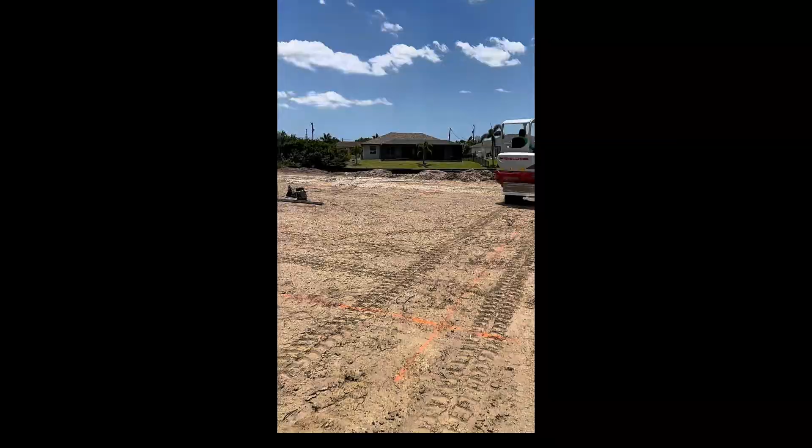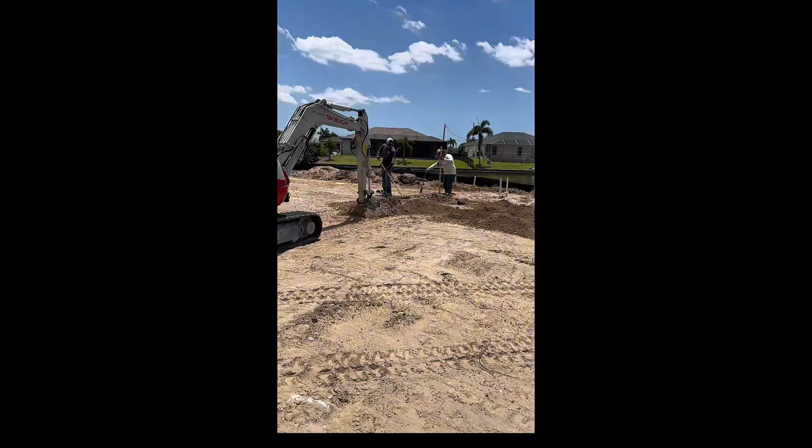This is the house pad that we built. They've spray painted where the exterior walls of the home are going to be built. And now they have the machine and they'll start digging the footers throughout this property, making sure it's deep enough with the laser level there.

Hi, if you're building a home or just curious about construction, this video is about footings and how a footing goes into a home and what to look for on an architectural plan. On our architectural plan, the foundation plan is on page A3. On this foundation plan, it's going to show us what needs to go into the home to support it on the foundation part of it.

When you hear building a house, obviously strong foundation equals a strong home. So it's very important that your builder, or you, if you're doing an owner builder, check the plan, make sure that it's being done correctly so that when your home is built, it's on a strong foundation. So this is one video of many that I put together. It's just informative, give you a little bit of idea how we put homes together.

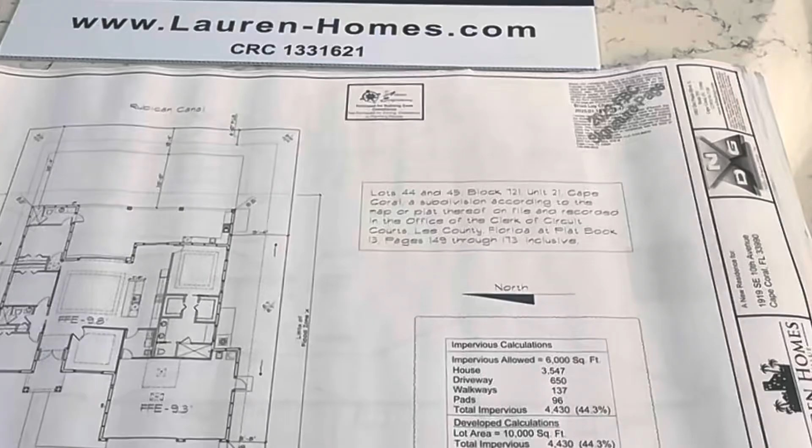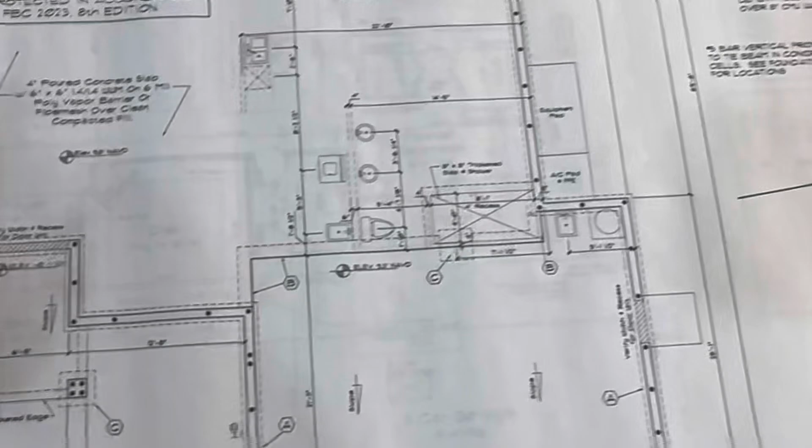Okay, so in regards to architectural engineered plans, there are several pages, and each page has different information that's important to the home build. But the one that we're going to focus on is page A3. Okay, this is our foundation plan and our typical wall section. So when we get a home, it's very important to understand what your plan says when we start to build in regards to what the foundation will be.

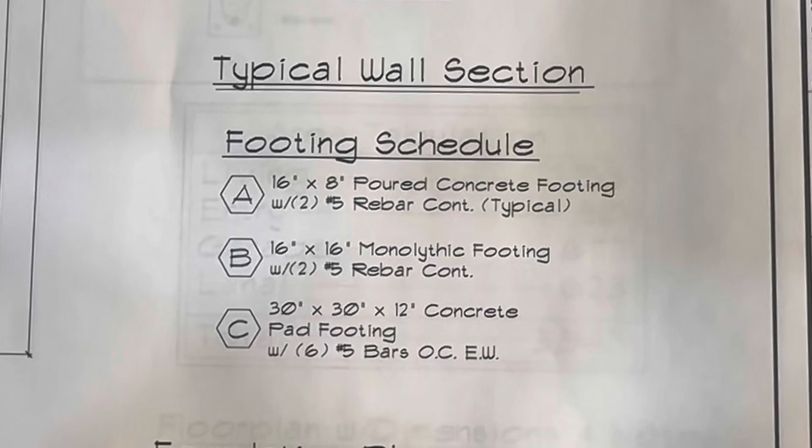Over here on the right hand side, it'll show the footing schedule, which has A, B, and a C. And you'll see that it says at the top one, let's just use that one as an example to start with. Number A is 16 inches by 8 inches poured concrete footing with 2 number 5 rebars.

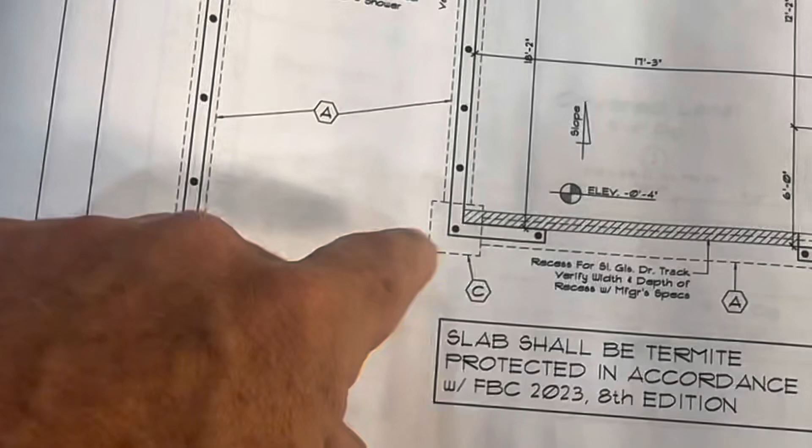Okay, so if we go over to our plan, we will see where it says A, and you'll see there'll be like a dotted line that goes all the way around. So that would be where we would have that 16 by 8 footer dug throughout the whole perimeter of this home with 2 number 5 rebars placed.

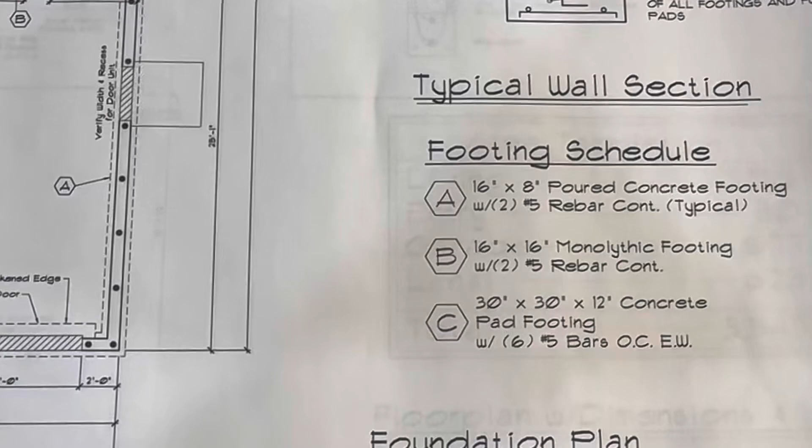You'll also see number B and a number C, which shows what needs to go in there in regards to the rebar, how many, and how deep and how wide the footing should be. So pretty simple. You go over here, see there's some C's there.

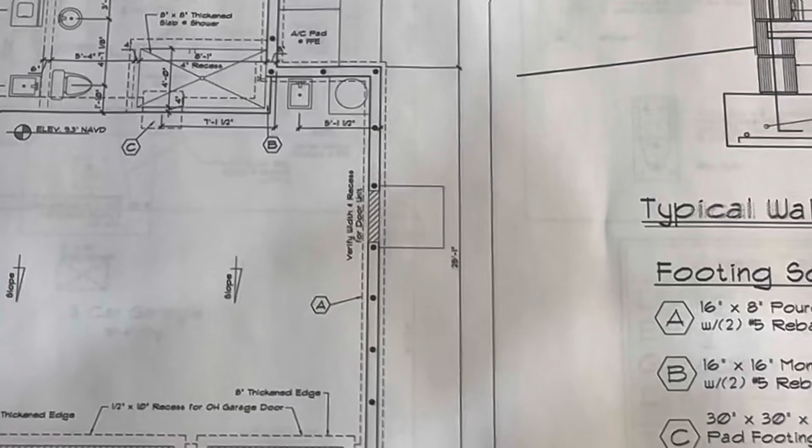So when I go out in the field and inspect the home, I'll open up the foundation plan. I'll have all the detail that I need in regards to what needs to be going on with this individual home. And I'll walk the outside and make sure the bars are there and that the footing is dug correctly.

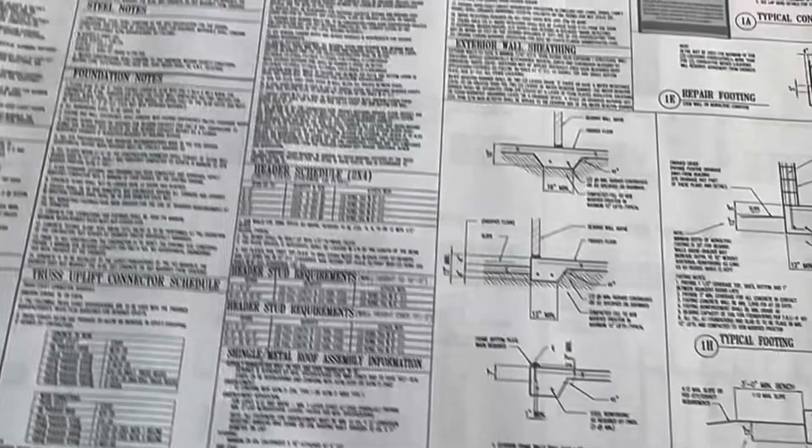Most of these plans also, engineers and architects, the house itself is designed for the individual property, but they also have some general notes on the back that are almost like generic add-ons, just in case you had any question what you're building or what it's saying.

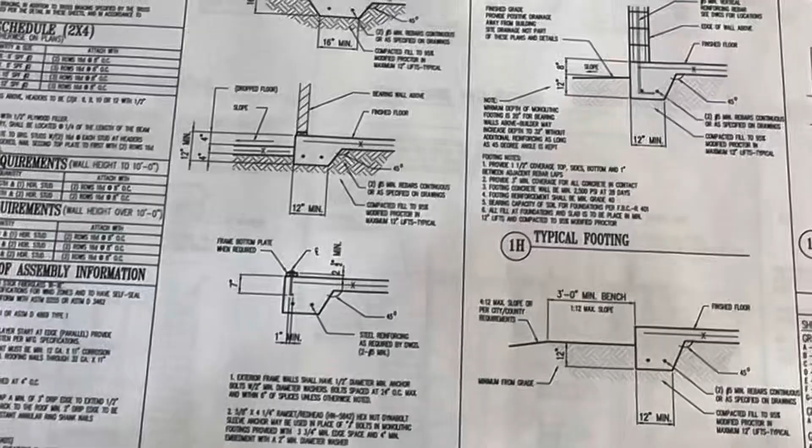So there's a typical footing that you'll see on this plan and a monolithic footing. So this gives a little bit more detail of what needs to happen if you were unsure of what page A3 was telling you to be built. But this is the beginning stages of the footing for a home. Very important that it is checked and that it is correct.